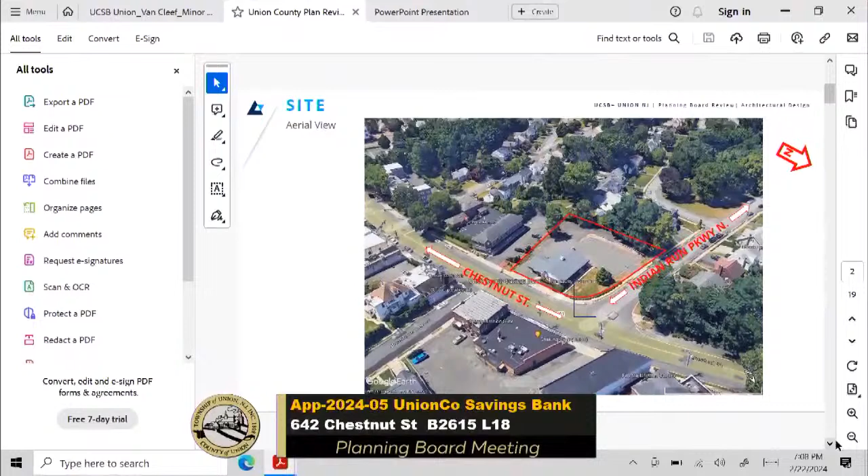Some of the things we're adding is a dumpster enclosure. At one point we were putting it next to the building, and now we're moving it to a back corner. We want to use a vinyl slat pre-manufactured product, and it's going to be in a dark gray color to represent the colors that we're doing on the exterior of the building.

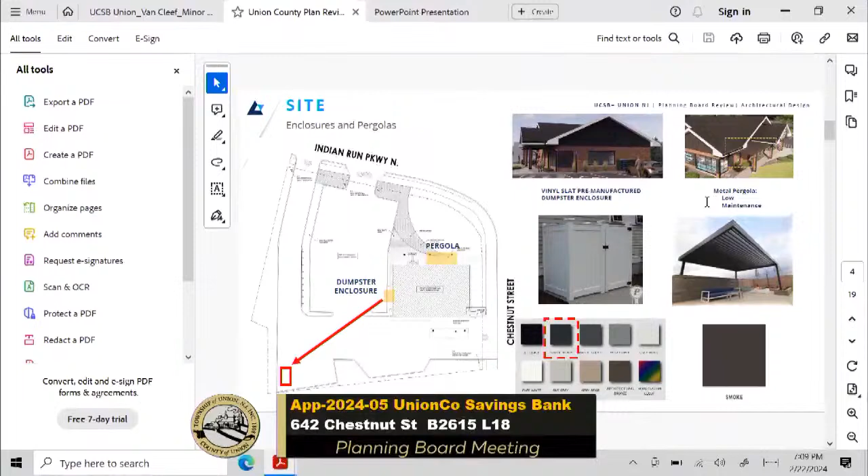We're also providing a new pergola to enhance the street access, pedestrian access from Chestnut to the new entrance. That'll be of a pre-finished aluminum with a smoke color, dark gray.

We're introducing the brand of the bank with better signage. We have a wall sign on Chestnut Street, a gabled end sign above the entrance. We're going to provide a sign with the logo only on the parking side to allow people better direction to access the entrance. And then we have the existing gabled end where we're going to provide signage so people driving north on Chestnut will have visibility and be alerted to the building's location.

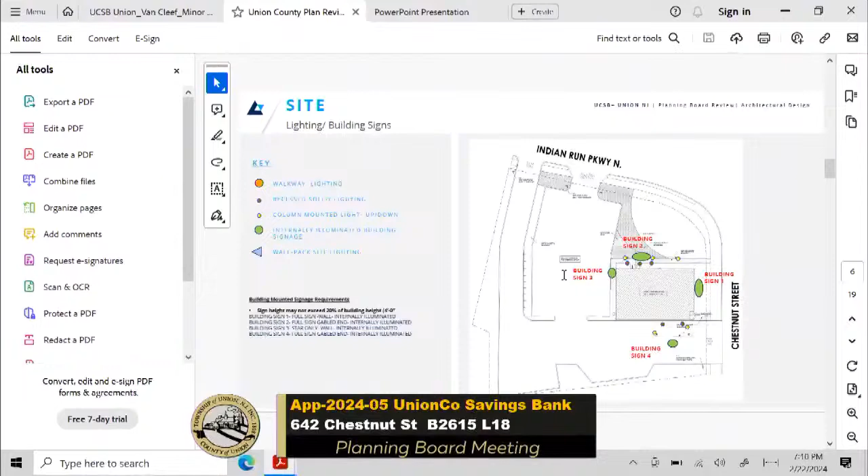We also are showing walkway lighting, recessed lighting in the soffit, column-mounted lights, and wall packs, which I'll talk about later.

Our sign on Chestnut Street is larger than 4 feet, but this is the most prominent facade of the building and will draw the most attention to itself. So we want to provide something that's large and very dynamic, 4'9" to the height of the sign. We're providing a wall panel behind it over the existing brick, which is more of a wall finish than it is the sign. But we're still within the area requirement, I believe, and we're just asking for consideration on the height limitation of 4 feet instead of the 4'9" we're showing. If you would consider that.

This is the sign on the gabled end of the entrance. Here you can see the new canopy we were talking about and the sign directly on the gabled end wall panel. We're holding the 4 foot high signage restriction here. It's basically the same color scheme and branding as the east elevation.

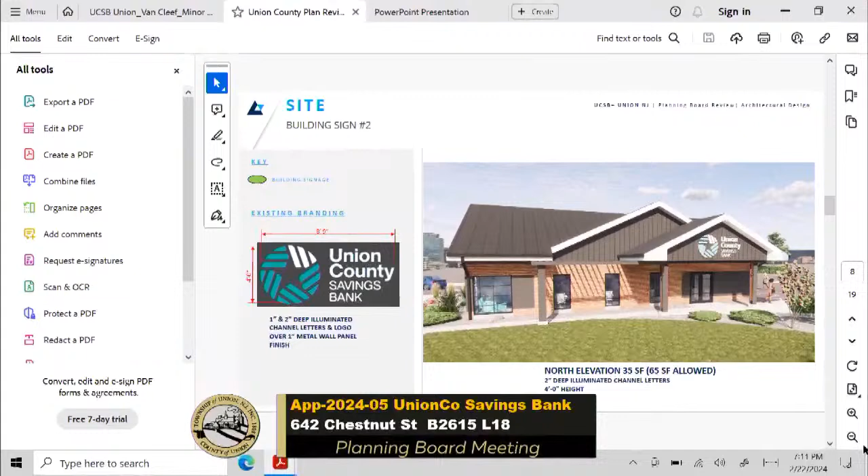This is the gabled end where we're adding signs to provide more visibility from vehicles approaching from the north. And I think I jumped over one.

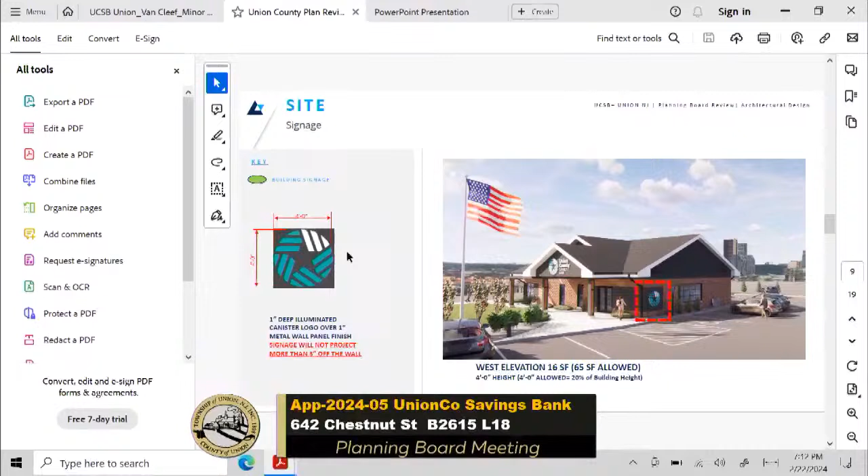Here is the parking side view where we're providing their brand only, just as a wayfinder for people from the parking lot to know the direction of travel to get to the entrance.

The depth of this sign is a raised canister logo, only 1 inch, and the panel behind it is 1 inch. So we're holding the overall depth of the sign to less than 3 inches, and the height of the sign at 4 feet.

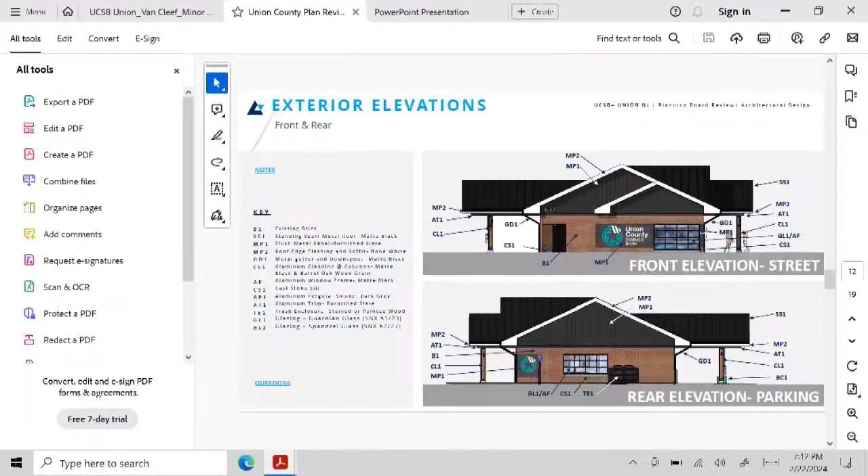Our exterior finishes: we're reusing the existing brick and introducing new materials above it with a standing seam metal roof in a matte black color with white aluminum trim. We have a flush metal panel on the gabled ends that's slightly less dark, a burnished slate color.

We're introducing, where there once was a walk-up teller window which is no longer used, an exit door at that location. Where there's an existing walkway approach to it, we're going to have exit only, for convenience of the customers and the employees.

Similar on the north elevation facing the north, and the drive-through to the south, similar materials. You'll see that we're also adding new windows in some areas, which is an aluminum storefront in a dark black color that closely matches the roof material.

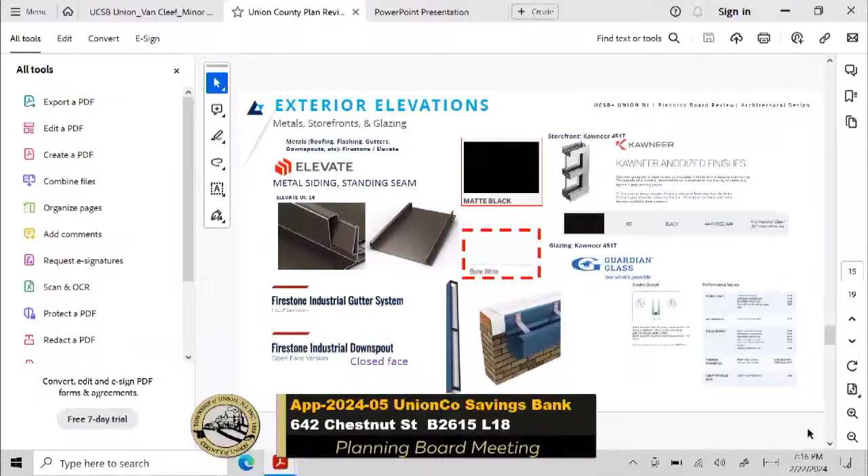When we talk about our building, this might give you a better idea of what we're doing. We're basically keeping the existing mechanical room and the existing vault, and redoing the rest of the building with new offices, meeting rooms, the teller lines, ADA accessible restrooms, and a new break room.

This is Chestnut Street to the right, and this is the existing walkway that was once their walk-up teller, now a point of egress. This is their existing door, where we're redoing the vestibule and the doors with new storefront, and you can see our canopy and pergola. Parking is approaching from the left.

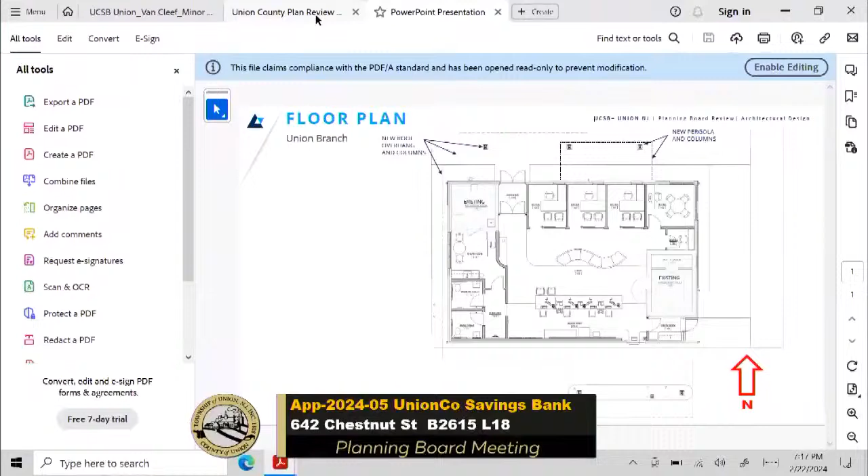For our site improvements, one of the main things we're doing is trying to enhance this whole edge. We want to remove this row of shrubs and replace it with sod, matching what this whole area has now. This really opens it up. There are some large trees we're removing, and we're putting in new landscaping along the building and the parking edge, creating an ADA parking stall, restriping some areas, and keeping the existing striping.

Some of the materials we're using, here's a blow-up of this area. You can see the entrance vestibule and the canopy. We're putting in stamped concrete to mimic paved pavers, and we're also providing some ground cover that's kind of like pea gravel.

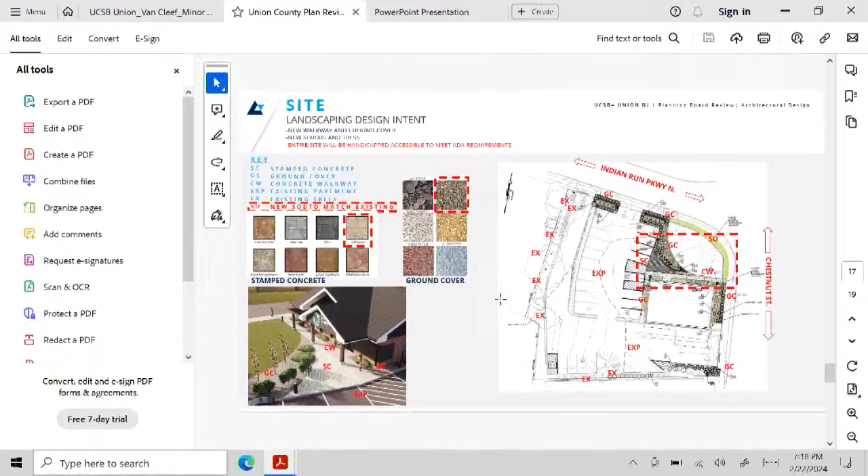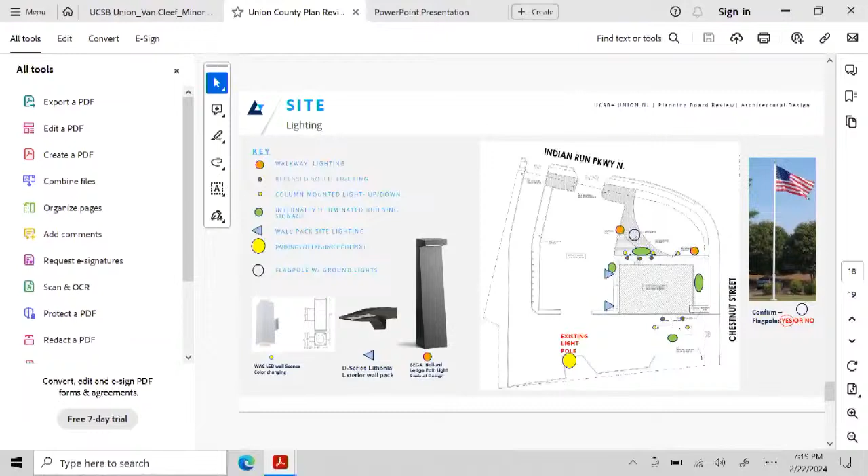These are some of the other things we're introducing. We have a large flag, walkway lights, bollards about 4 foot tall, and some lighting on the back of the building to add additional lighting to the parking lot, enhancing what the owners have done with the existing light pole and new lights there. There's also under-canopy lighting, and the columns will have lights on them too, up lights like these, which will be color controlled over different parts of the year, dimmable and computer controlled, providing another level of interest to this area. That's all I have about the site, and Joseph, the civil engineer, will fill you in on the rest of the elements of the site.

Well, I think your lawyer may have some questions. Yeah, no, great explanation of the interior and exterior improvements, so I have no further questions. Any questions from the board? All right, I have a question.

I know you mentioned you're licensed as an architect in Wisconsin. That's right. Are you licensed in New Jersey? No. Okay, whose work did you work under, someone authorized in New Jersey? The president of architecture in our office is Michael Ehrlich. He's been licensed in New Jersey for over 5 years. And he is a licensed architect in New Jersey? Correct. Okay, I'm just going to have to make an inquiry with our counsel, because I want to make sure we can vote based on testimony from an architect who's not licensed in New Jersey. I just want to make sure we can do that, okay? Yeah.

Can we? Yeah, he worked on it. We're good? He's good. He's also the architect of record. He stamped these drawings, he's the architect of record, like I said. That's fine, as long as we protect the record that we inquired. Right, and we're fine, no problem. Your testimony was very polished and professional, I thought. Thank you. Great, okay, next witness?

Yes, I'd like to call upon Joseph Vuch, our site engineer. Nice work. Can you say and spell your name, please? Sure, Joe Vuich, that's V as in Victor,

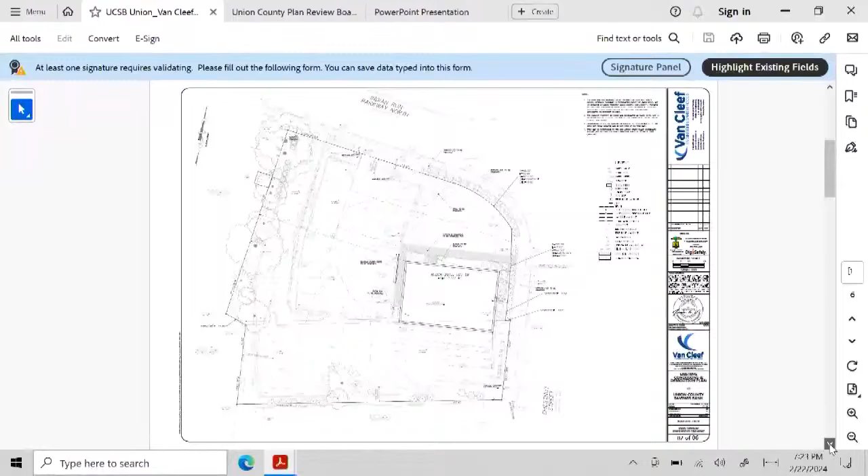So if we look at the overall site plan, we see very similar common elements of that same walkway and access from Chestnut. Extensive landscaping with a gravel base to allow for infiltration through to the plant mediums planted throughout this area, and resetting the sidewalk through this area for ADA accessibility from this stall through the accessible ramp at this location.

And with the resetting of the striping in this location, we've reduced from 27 existing parking spaces to 25, utilizing this area as the patrons' primary access to the parking lot safely while coming over the proposed sidewalk, as well as this patio area here that complements the arch to go along with the aesthetics of the landscaping.

So here's our proposed landscaping scheme. As you can see, there's rather dense planting throughout the Indian Run side, complementing the entrance, a two-way entrance in and out, as well as arching around and identifying an isolation from the existing corner and the busyness of the street, so patrons can safely access from the parking lot into the property, and promoting access from the street to the proposed sidewalk locations as opposed to across the lawn space.

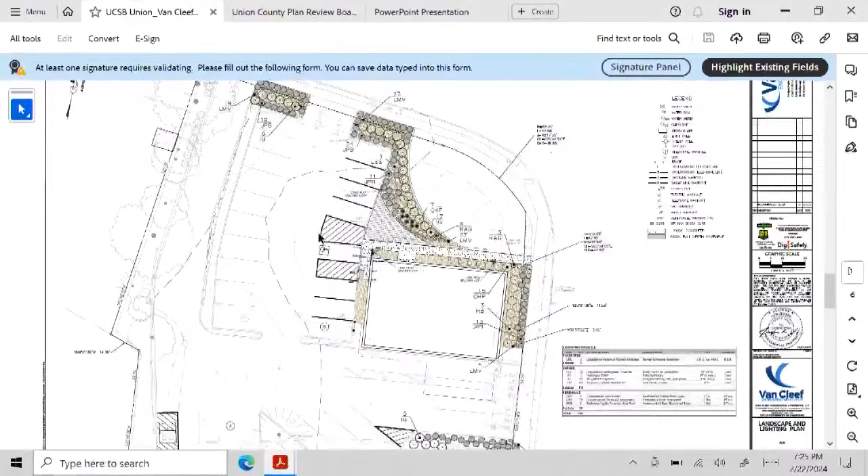With our parking lot improvements, I mentioned we are restriping. We are not doing any grading changes. The parking lot is being seal coated and restriped. The grading that exists in this location, we were able to identify a location for ADA compliance of this space, relocating the space to here, and providing accessibility for a complete route into the building.

That is one thing that was noted in the engineer's letter. We'll add that as a note on the plan, providing it in testimony tonight to confirm that it is already in place in our plans without revisions.

We are also locating our trash enclosure. Previously, the property operated without a trash enclosure. The trash, a small amount of waste, would be taken out to the curb when necessary. At this location in the rear, we'll have the ability to be more compliant with the code by providing a trash enclosure. We don't believe they're going to need it for any increase in activity.

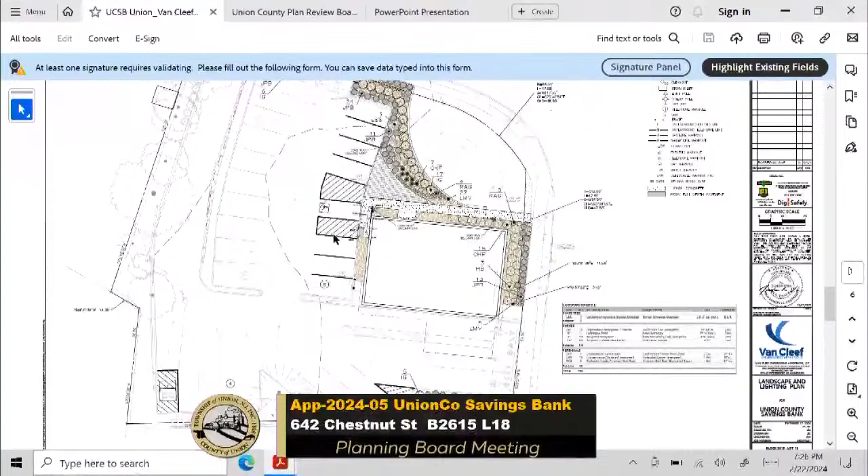There's no change in density to the site in any way that's going to create issues, and we're all more paperless nowadays, right? So we've lost a space in that corner because of that, and we've lost a space with the restriping for the ADA, bringing us down to 25 spaces instead of 27. We're well over the 16, I believe, that was required by the code.

With that, I also believe one of the comments from the engineer regarding make-ready spaces—we are willing to comply. However, I do believe that based on the exemption of section D2H in the ordinance, which follows the state's model ordinance, 25 parking spaces or fewer are exempt from providing the electric vehicle infrastructure.

So I would just note that it would be the board's discretion if you'd like us to still run conduit and have a make-ready space. We are willing to work with that, Mr. Hatter. I believe there were 7 questions that we had here, yes, on page 2 of the letter.

And paragraph 2.1 to 2.7, you'll be able to comply with those requests, sir? Yes, we will be able to comply.

The county, so both the county and the municipality have rights of way. We'll show the sight triangles on our plans for revision for resolution compliance. We'll address revisions to the landscaping appropriately to remove out of those areas. We are promoting ground perennials along the frontage, but I did note that we did have some shrubs that may be in conflict, so we'll remove those.

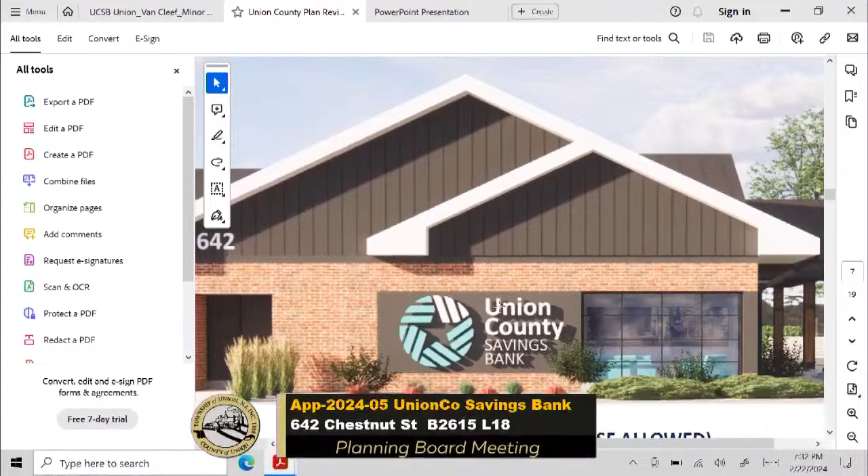With that, I also see that it's a strong planning alternative to strict compliance with the code, in that downsizing and scaling at that location would look a little bit out of normal and not as natural at a smaller size, because as we look at the features of the building and we look to the additional sides of the building, we notice the same architectural features.

So we're carrying these same features on the other facades with the metal banding and the same height and elevation of the full-size windows. So it's a complement 360 around the entirety of the building.

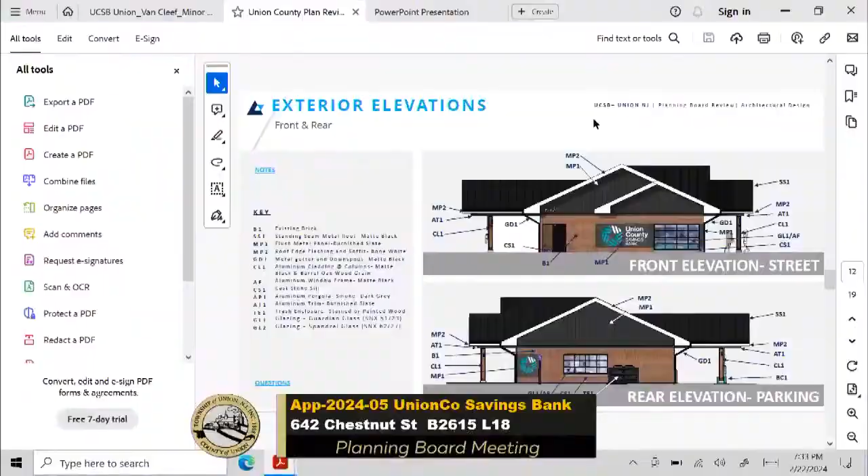One other point to note, it is not a variance on the application, but your code is specific about signage being permitted one per side, on the sides that face the street as well as the sides that face the parking. On this building we have 4 signs on all 4 sides. We have frontage on 2 sides as a corner lot, so it's naturally permitted under the code for signage on both those locations. We have our small sign on the rear for wayfinding from the parking lot, and we do have a sign above the drive-through. That sign still orients towards the angled parking on that side as well as the drive-through, so that's why it wasn't identified by us, or by your professionals, as a variance for the application.

Great, thank you very much. Again, no further questions at this point. Questions from the board? Yes, I have a question.

Could you address items 2.3, 2.4, and 2.5 of the letter? Sorry, I generalized over that.

We will comply specifically to install stop signs and stop bars at both entrances. I had actually made a mistake in preparing the plans, I mislocated the trench drain as existing striping that was recently put down, so I thought we had that stop bar in that location, but we will comply there.